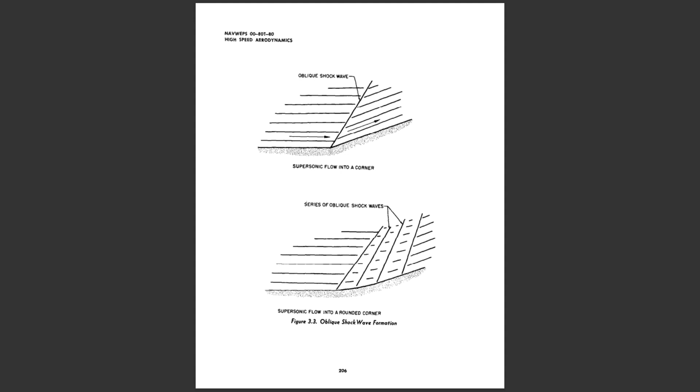The previous flow across a wedge in a supersonic airstream would allow flow in 2 dimensions. If a cone were placed in a supersonic airstream, the airflow would occur in 3 dimensions, and there would be some noticeable differences in flow characteristics.

3-dimensional flow for the same Mach number and flow direction change would produce a weaker shockwave with less change in pressure and density. Also, this conical wave formation allows changes in airflow that continue to occur past the wave front, and the wave strength varies with distance away from the surface. Figure 3.5 depicts the typical 3-dimensional flow past a cone.

Oblique shock waves can be reflected like any pressure wave, and this effect is shown in Figure 3.5. This reflection appears logical and necessary, since the original wave changes the flow direction toward the wall, and the reflected wave creates the subsequent flow change to cause the flow to remain parallel to the wall surface.

This reflection phenomenon places definite restrictions on the size of a model in a wind tunnel, since a wave reflected back to the model would cause a pressure distribution not typical of free flight.

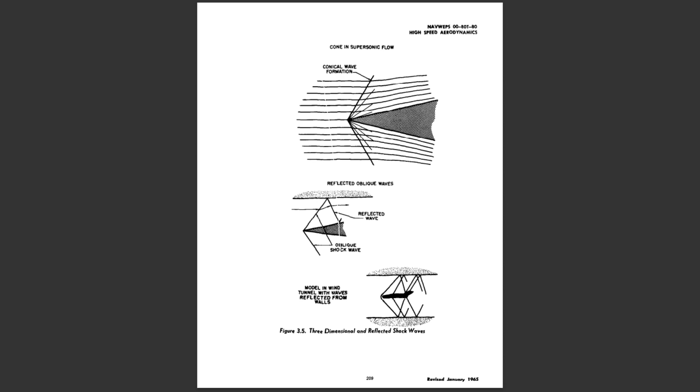Normal shock wave. If a blunt-nosed object is placed in a supersonic airstream, the shock wave which is formed will be detached from the leading edge. This detached wave also occurs when a wedge or cone angle exceeds some critical value.

Whenever the shock wave forms perpendicular to the upstream flow, the shock wave is termed a normal shock wave, and the flow immediately behind the wave is subsonic.

Any relatively blunt object in a supersonic airstream will form a normal shock wave immediately ahead of the leading edge, slowing the airstream to subsonic so the airstream may feel the presence of the blunt nose and flow around it. Once past the blunt nose, the airstream may remain subsonic or accelerate back to supersonic, depending on the shape of the nose and the Mach number of the free stream.

In addition to the formation of normal shock waves described above, this same type of wave may be formed in an entirely different manner when there is no object in the supersonic airstream. Whenever a supersonic airstream is slowed to subsonic without a change in direction, a normal shock wave will form as a boundary between the supersonic and subsonic regions. This is an important fact, since aircraft usually encounter some compressibility effects before the flight speed is sonic.

Figure 3.6 illustrates the manner in which an airfoil at high subsonic speeds has local flow velocities which are supersonic. As the local supersonic flow moves aft, a normal shock wave forms, slowing the flow to subsonic.

The transition of flow from subsonic to supersonic is smooth, and is not accompanied by shock waves if the transition is made gradually with a smooth surface. The transition of flow from supersonic to subsonic without direction change always forms a normal shock wave. A supersonic airstream passing through a normal shock wave will experience these changes.

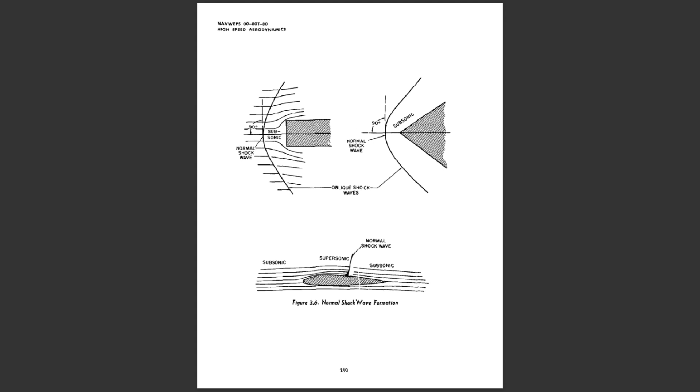3. The static pressure of the airstream behind the wave is increased greatly. 4. The density of the airstream behind the wave is increased greatly. 5. The energy of the airstream, indicated by total pressure, dynamic plus static, is greatly reduced. The normal shock wave is very wasteful of energy.

Expansion wave. If a supersonic airstream were turned away from the preceding flow, an expansion wave would form. The flow around a corner, shown in Figure 3.7, will not cause sharp sudden changes in the airflow except at the corner itself, and thus is not actually a shock wave.

A supersonic airstream passing through an expansion wave will experience these changes. 1. The airstream is accelerated, the velocity and Mach number behind the wave are greater.

The flow direction is changed to flow along the surface, provided separation does not occur. The static pressure of the airstream behind the wave is decreased.

The density of the airstream behind the wave is decreased. Since the flow changes in a rather gradual manner, there is no shock and no loss of energy in the airstream. The expansion wave does not dissipate airstream energy.

The expansion wave in 3 dimensions is a slightly different case, and the principal difference is the tendency for the static pressure to continue to decrease past the wave.

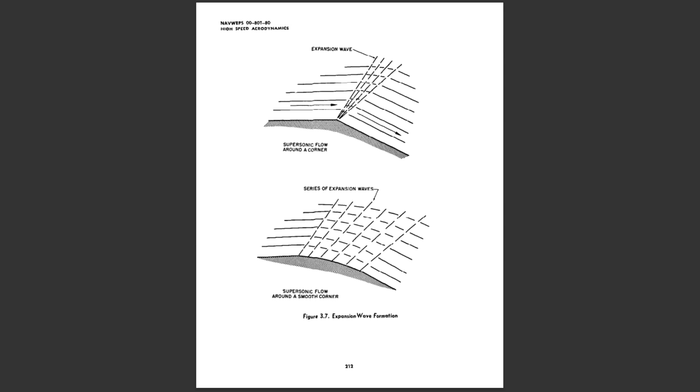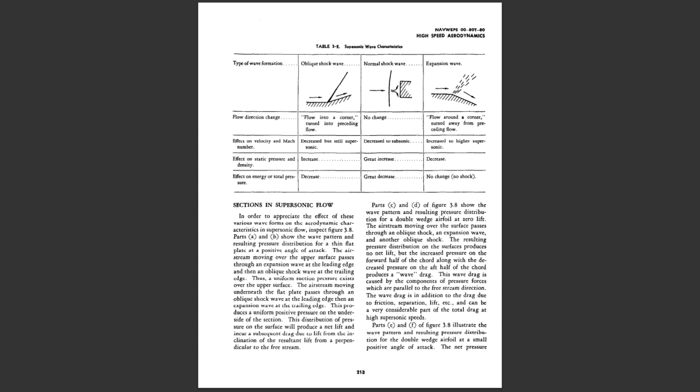The following table is provided to summarize the characteristics of the 3 principal wave forms encountered with supersonic flow sections. In order to appreciate the effect of these various wave forms on the aerodynamic characteristics in supersonic flow, inspect Figure 3.8.

Parts A and B show the wave pattern and resulting pressure distribution for a thin flat plate at a positive angle of attack. The airstream moving over the upper surface passes through an expansion wave at the leading edge, and then an oblique shock wave at the trailing edge. Thus, a uniform suction pressure exists over the upper surface.

The airstream moving underneath the flat plate passes through an oblique shock wave at the leading edge, then an expansion wave at the trailing edge. This produces a uniform positive pressure on the underside of the section.

This distribution of pressure on the surface will produce a net lift and incur a subsequent drag due to lift, from the inclination of the resultant lift from a perpendicular to the free stream.

Parts C and D of Figure 3.8 show the wave pattern and resulting pressure distribution for a double wedge airfoil at 0 lift. The airstream moving over the surface passes through an oblique shock, an expansion wave, and another oblique shock. The resulting pressure distribution on the surfaces produces no net lift,

but the increased pressure on the forward half of the chord along with the decreased pressure on the aft half of the chord produce a wave drag. This wave drag is caused by the components of pressure forces which are parallel to the free stream direction.

The wave drag is in addition to the drag due to friction, separation, lift, etc., and can be a very considerable part of the total drag at high supersonic speeds.

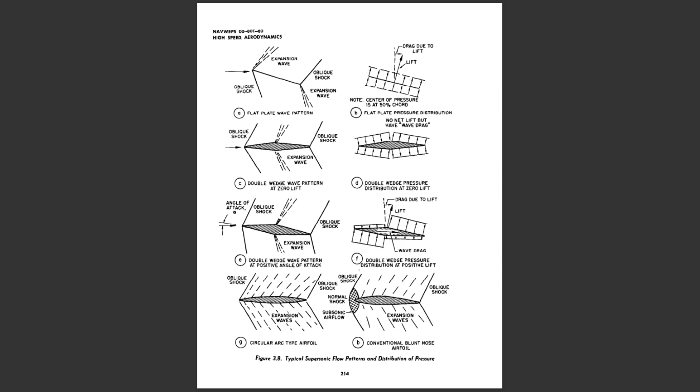Configuration effects. Transonic and supersonic flight.

Any object in subsonic flight which has some finite thickness or is producing lift will have local velocities on the surface which are greater than the free stream velocity. Hence, compressibility effects can be expected to occur at flight speeds less than the speed of sound.

The transonic regime of flight provides the opportunity for mixed subsonic and supersonic flow and accounts for the first significant effects of compressibility. Consider a conventional airfoil shape as shown in Figure 3.9. If this airfoil is at a flight Mach number of 0.50 and a slight positive angle of attack, the maximum local velocity on the surface will be greater than the flight speed, but most likely less than sonic speed.

Assume that an increase in flight Mach number to 0.72 would produce the first evidence of local sonic flow. This condition of flight would be the highest flight speed possible without supersonic flow and would be termed the critical Mach number. Thus, critical Mach number is the boundary between subsonic and transonic flight and is an important point of reference for all compressibility effects encountered in transonic flight.

By definition, critical Mach number is the freestream Mach number which produces first evidence of local sonic flow. Therefore, shock waves, buffet, airflow separation, etc., take place above critical Mach number.

As critical Mach number is exceeded, an area of supersonic airflow is created, and a normal shock wave forms as the boundary between the supersonic flow and the subsonic flow on the aft portion of the airfoil surface. The acceleration of the airflow from subsonic to supersonic is smooth and unaccompanied by shock waves if the surface is smooth, and the transition gradual.

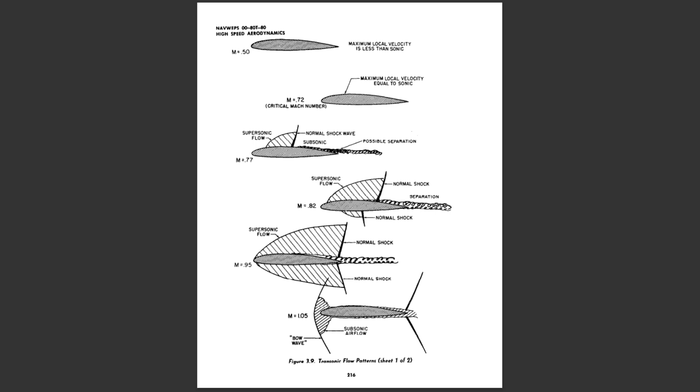Of course, all components of the aircraft are affected by compressibility in a manner somewhat similar to that of the basic airfoil. The tail, fuselage, nacelles, canopy, etc., and the effect of the interference between the various surfaces of the aircraft must be considered.

Force divergence. The airflow separation induced by shock wave formation can create significant variations in the aerodynamic force coefficients. When the free stream speed is greater than the critical Mach number, some typical effects on an airfoil section are as follows. One, an increase in the section drag coefficient for a given section lift coefficient.

Two, a decrease in section lift coefficient for a given section angle of attack. Three, a change in section pitching moment coefficient.

A reference point is usually taken by a plot of drag coefficient versus Mach number for a constant lift coefficient. Such a graph is shown in Figure 3.10. The Mach number which produces a sharp change in the drag coefficient is termed the force divergence Mach number and, for most airfoils, usually exceeds the critical Mach number at least 5 to 10%. This condition is also referred to as the drag divergence or drag rise.

Phenomena of transonic flight. Associated with the drag rise are buffet, trim, and stability changes, and a decrease in control surface effectiveness. Conventional aileron, rudder, and elevator surfaces subjected to this high-frequency buffet may buzz, and changes in hinge moments may produce undesirable control forces.

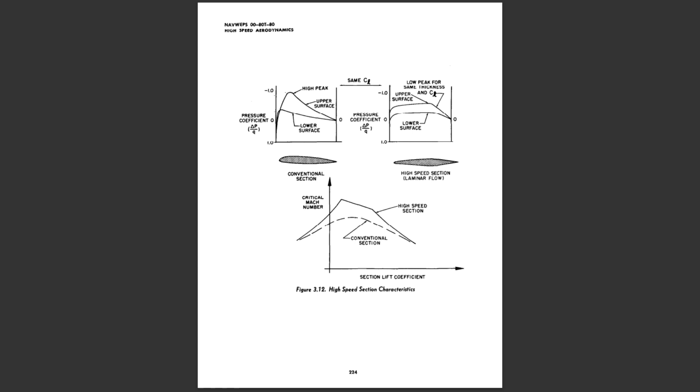In order to obtain a high critical Mach number from an airfoil at some low lift coefficient, the section must have: a) Low thickness ratio. The point of maximum thickness should be aft to smooth the pressure distribution. b) Low camber. The mean camber line should be shaped to help minimize the local velocity peaks. In addition, the higher the required lift coefficient, the lower the critical Mach number, and more camber is required of the airfoil.

If supersonic flight is a possibility, the thickness ratio and leading edge radius must be small to decrease wave drag. Figure 3.13 shows the flow patterns for two basic supersonic airfoil sections and provides the approximate equations for lift, drag, and lift curve slope.

Since the wave drag is the only factor of difference between the two airfoil sections, notice the configuration factors which affect the wave drag. For the same thickness ratio, the circular arc airfoil would have a larger wedge angle formed between the upper and lower surfaces at the leading edge. At the same flight Mach number, the larger angle at the leading edge would form the stronger shock wave at the nose and cause a greater pressure change on the circular arc airfoil.

This same principle applies when investigating the effect of airfoil thickness. Notice that the wave drag coefficients for both airfoils vary as the square of the thickness ratio, e.g., if the thickness ratio were doubled, the wave drag coefficient would be 4 times as great. If the thickness were increased, the airflow at the leading edge will experience a greater change in direction, and a stronger shock wave will be formed.

This powerful variation of wave drag with thickness ratio necessitates the use of very thin airfoils with sharp leading edges for supersonic flight. An additional consideration is that thin airfoil sections favor the use of low aspect ratios and high taper to obtain lightweight structures and preserve stiffness and rigidity.

The parameter, square root of M squared minus 1, appears in the denominator of each of the equations for the aerodynamic coefficients, and indicates a decrease in each of these coefficients with an increase in Mach number. Essentially, this means that any aerodynamic surface becomes less sensitive to changes in angle of attack at higher Mach numbers. The decrease in lift curve slope with Mach number has tremendous implications in the stability and control of high-speed aircraft.

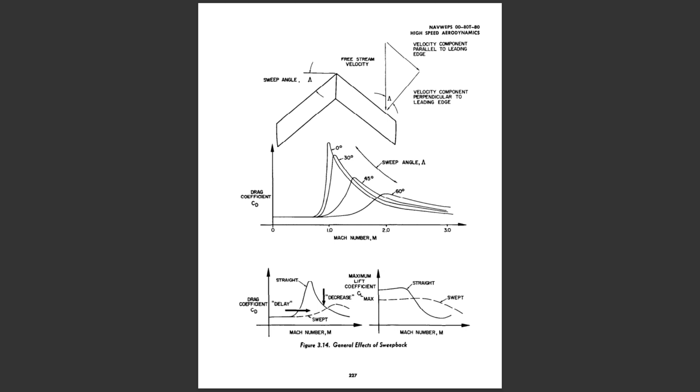An immediate conclusion is that sweepback is a device of greatest application in the regime of transonic flight. A few of the less significant advantages of sweepback are as follows.

First, the wing lift curve slope is reduced for a given aspect ratio. This is illustrated by the lift curve comparison of figure 3.15 for the straight and swept wing. Any reduction of lift curve slope implies the wing is less sensitive to changes in angle of attack.

This is a beneficial effect only when the effect of gusts and turbulence is considered. Since the swept wing has the lower lift curve slope, it will be less sensitive to gusts and experience less bump due to gust for a given aspect ratio and wing loading. This is a consideration particular to the aircraft whose structural design shows a predominating effect of the gust load spectrum, e.g., transport, cargo, and patrol types.

Second, divergence of a surface is an aeroelastic problem which can occur at high dynamic pressures. Combined bending and twisting deflections interact with aerodynamic forces to produce sudden failure of the surface at high speeds. Sweep forward will aggravate this situation by leading the wing into the wind stream, and tends to lower the divergence speed. On the other hand, sweepback tends to stabilize the surface by trailing and tends to raise the divergence speed. By this tendency, sweepback may be beneficial in preventing divergence within the anticipated speed range.

Third, sweepback contributes slightly to the static directional, or weathercock, stability of an aircraft. This effect may be appreciated by inspection of figure 3.14, which shows the swept wing in a yaw or side slip. The wing into the wind has less sweep and a slight increase in drag, the wing away from the wind has more sweep and less drag. The net effect of these force changes is to produce a yawing moment, tending to return the nose into the relative wind. This directional stability contribution is usually small and of importance in tailless aircraft only.

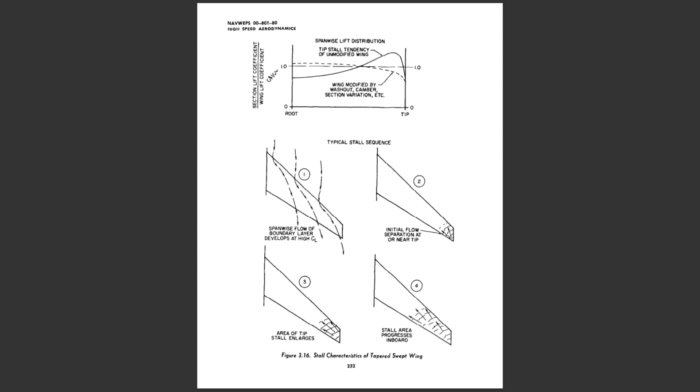The combined effect of taper and sweep present a considerable problem of tip stall, illustrated by the flow patterns of figure 3.16. Design for high-speed performance may dictate high sweepback, while structural efficiency may demand a highly tapered planform. When such is the case, the wing may require extensive aerodynamic tailoring to provide a suitable stall pattern and a lift distribution at cruise condition which reduces drag due to lift. Washout of the tip, variation of section camber throughout span, flow fences, slats, leading edge extension, etc., are typical devices used to modify the stall pattern and minimize drag due to lift at cruise condition.

As shown by the lift curve of figure 3.15, the use of sweepback will reduce the lift curve slope and the subsonic maximum lift coefficient. It is important to note this case is definitely subsonic, since sweepback may be used to improve the transonic maneuvering capability. Various sweep angles applied to wings of moderate aspect ratio produce these approximate effects on the subsonic lift characteristics.

Sweep angle 0 degrees: 0% reduction of subsonic maximum lift coefficient and lift curve slope. Sweep angle 15 degrees: 4% reduction. Sweep angle 30 degrees: 14% reduction. Sweep angle 45 degrees: 30% reduction. Sweep angle 60 degrees: 50% reduction of subsonic maximum lift coefficient and lift curve slope.

The reduction of the low speed maximum lift coefficient, which is in addition to that lost due to tip stall, has very important implications in design. If wing loading is not reduced, stall speeds increase, and subsonic maneuverability decreases. On the other hand, if wing loading is reduced, the increase in wing surface area may reduce the anticipated benefit of sweepback in the transonic flight regime. Since the requirements of performance predominate, certain increases of stall speeds, takeoff speeds, and landing speeds usually will be accepted.

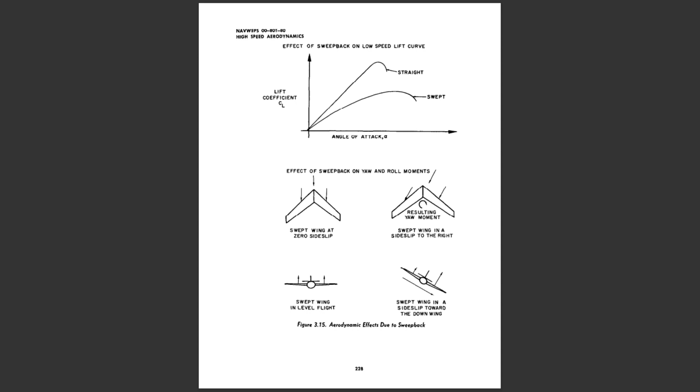While the reduction of lift curve slope may be an advantage for gust considerations, the reduced sensitivity to changes in angle of attack has certain undesirable effects in subsonic flight. The reduced wing lift curve slope tends to increase maximum lift angles of attack and complicate the problem of landing gear design and cockpit visibility. Also, the lower lift curve slope would reduce the contribution to stability of a given tail surface area.

Third, the use of sweepback will reduce the effectiveness of trailing edge control surfaces and high lift devices. A typical example of this effect is the application of a single slotted flap over the inboard 60% span to both a straight wing and a wing with 35-degree sweepback. The flap applied to the straight wing produces an increase in maximum lift coefficient of approximately 50%. The same type flap applied to the swept wing produces an increase of approximately 20%. To produce some reasonable maximum lift coefficient, a swept wing may require unsweeping the flap hinge line, application of leading-edge high-lift devices such as slots or slats, and possibly boundary layer control.

Fourth, as described previously, sweepback contributes to lateral stability by producing stable rolling moments with side slip. The lateral stability contribution of sweepback varies with the amount of wing sweepback and wing lift coefficient. Large sweepback and high lift coefficients produce large contributions to lateral stability. While stability is desirable, any excess of stability will reduce controllability. For the majority of airplane configurations, high lateral stability is neither necessary nor desirable, but adequate control in roll is absolutely necessary for good flying qualities.

An excess of lateral stability from sweepback can aggravate Dutch roll problems and produce marginal control during crosswind takeoff and landing where the aircraft must move in a controlled side slip. Therefore, it is not unusual to find swept-wing aircraft with negative dihedral and lateral control devices designed principally to meet crosswind takeoff and landing requirements.

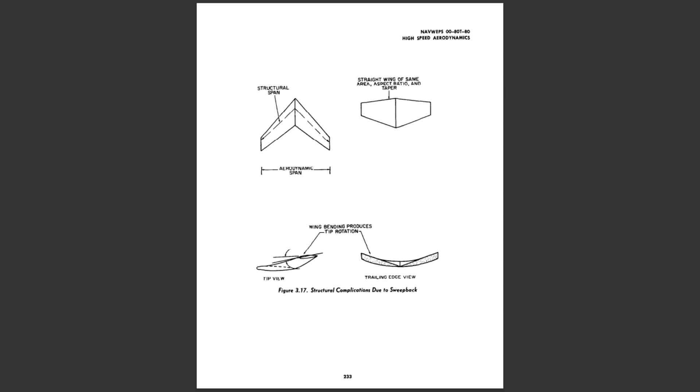Effect of aspect ratio and tip shape.

In addition to wing sweep, planform properties such as aspect ratio and tip shape can produce significant effects on the aerodynamic characteristics at high speeds. There is no particular effect of aspect ratio on critical Mach number at high or medium aspect ratios. The aspect ratio must be less than 4 or 5 to produce any apparent change in critical Mach number.

This effect is shown for a typical 9% thick symmetrical airfoil in the graph of Figure 3.18. Note that very low aspect ratios are required to cause a significant increase in critical Mach number. Very low aspect ratios create the extremes of three-dimensional flow and a subsequent increase in free stream speed to create local sonic flow.

Actually, the extremely low aspect ratios required to produce high critical Mach numbers are not too practical. Generally, the advantage of low aspect ratios must be combined with sweepback and high-speed airfoil sections.

The thin rectangular wing in supersonic flow illustrates several important facts. As shown in Figure 3.18, Mach cones form at the tips of the rectangular wing and affect the pressure distribution on the area within the cone. The vortex develops within the tip cone due to the pressure differential, and the resulting average pressure on the area within the cone is approximately half the pressure between the cones.

Three-dimensional flow on the wing is then confined to the area within the tip cones, while the area between the cones experiences pure two-dimensional flow.

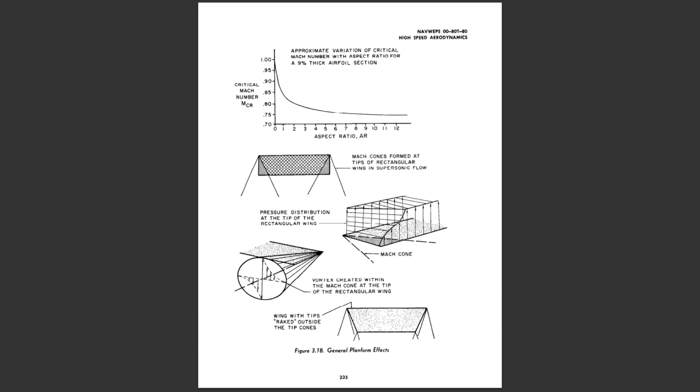This comparison makes it obvious that supersonic flight does not demand the use of high aspect ratio planforms typical of low-speed aircraft. In fact, low aspect ratios and high taper are favorable from the standpoint of structural considerations if very thin sections are used to minimize wave drag.

If sweepback is applied to the supersonic wing, the pressure distribution will be affected by the location of the Mach cone with respect to the leading edge. Figure 3.19 illustrates the pressure distribution for the delta wing planform in supersonic flight, with the leading edge behind or ahead of the Mach cone.

When the leading edge is behind the Mach cone, the components of velocity perpendicular to the leading edge are still subsonic, even though the free stream flow is supersonic, and the resulting pressure distribution will greatly resemble the subsonic pressure distribution for such a planform.

Tailoring the leading edge shape and camber can minimize the components of the high leading edge suction pressure, which are inclined in the drag direction, and the drag due to lift can be reduced.

If the leading edge is ahead of the Mach cone, the flow over this area will correspond to the two-dimensional supersonic flow and produce constant pressure for that portion of the surface between the leading edge and the Mach cone.

Control surfaces. The design of control surfaces for transonic and supersonic flight involves many important considerations. This fact is illustrated by the typical transonic and supersonic flow patterns of Figure 3.19. Trailing edge control surfaces can be affected adversely by the shock waves formed in flight above critical Mach number.

If the airflow is separated by the shock wave, the resulting buffet of the control surface can be very objectionable. In addition to the buffet of the surface, the change in the pressure distribution due to separation and the shock wave location can create very large changes in control surface hinge moments.

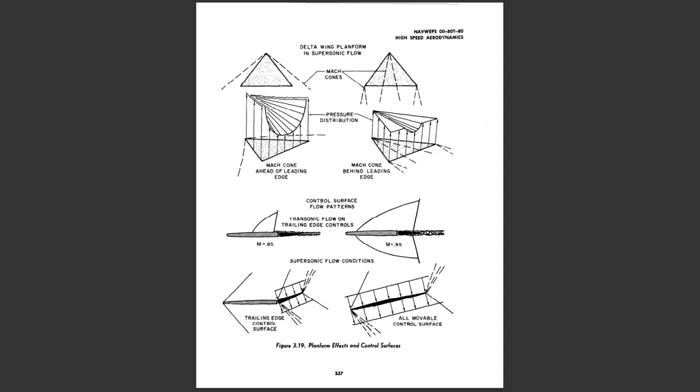Supersonic engine inlets. Air which enters the compressor section of a jet engine or the combustion chamber of a ramjet usually must be slowed to subsonic velocity. This process must be accomplished with the least possible waste of energy.

At flight speeds just above the speed of sound, only slight modifications to ordinary subsonic inlet design produce satisfactory performance. However, at supersonic flight speeds, the inlet design must slow the air with the weakest possible series, or combination, of shock waves to minimize energy losses and temperature rise.

Figure 3.20 illustrates some of the various forms of supersonic inlets or diffusers. One of the least complicated types of inlet is the simple normal shock type diffuser. This type of inlet employs a single normal shock wave at the inlet with a subsequent internal subsonic compression. At low supersonic Mach numbers, the strength of the normal shock wave is not too great, and this type of inlet is quite practical. At higher supersonic Mach numbers, the single normal shock wave is very strong and causes a great reduction in the total pressure recovered by the inlet.

In addition, it is necessary to consider that the wasted energy of the airstream will appear as an additional undesirable rise in temperature of the captured inlet airflow.

If the supersonic airstream can be captured, the shock wave formations will be swallowed, and a gradual contraction will reduce the speed to just above sonic. The subsequent diverging flow section can then produce the normal shock wave, which slows the airstream to subsonic. Further expansion continues to slow the air to lower subsonic speeds. This is the convergent-divergent type inlet shown in figure 3.20.

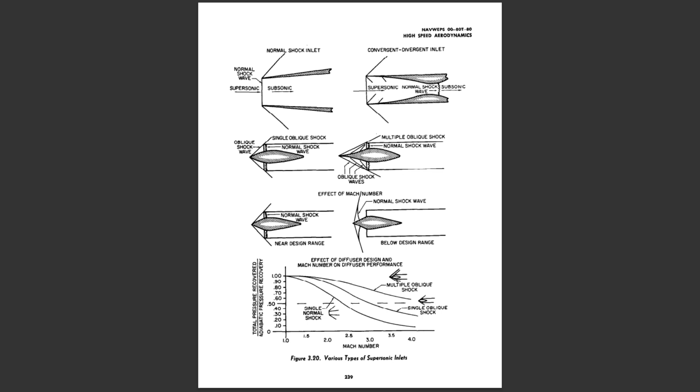In order to develop a good, stable inlet design, the performance at the design condition may be compromised. A large variation of inlet flow conditions may require special geometric features for the inlet surfaces, or a completely variable geometry inlet design. Supersonic configurations.

When all the various components of the supersonic airplane are developed, the most likely general configuration properties will be as follows.

1. The wing will be of low aspect ratio, have noticeable taper, and have sweepback depending on the design speed range. The wing sections will be of low thickness ratio and require sharp leading edges.

2. The fuselage and nacelle will be of high fineness ratio, long and slender. The supersonic pressure distribution may create significant lift and drag, and require consideration of the stability contribution of these surfaces.

3. The tail surfaces will be similar to the wing: low aspect ratio, tapered, swept, and a thin section with sharp leading edge. The controls will be fully powered and irreversible, with all movable surfaces the most likely configuration.

4. In order to reduce interference drag in transonic and supersonic flight, the gross cross-section of the aircraft may be area-ruled to approach that of some optimum high-speed shape.

One of the most important qualities of high-speed configurations will be the low-speed flight characteristics. The low aspect ratio swept-wing planform has the characteristic of high induced drag at low flight speeds.

Steep turns, excessively low airspeeds, and steep, power-off approaches can then produce extremely high rates of descent during landing. Sweepback and low aspect ratio can cause severe deterioration of handling qualities at speeds below those recommended for takeoff and landing.

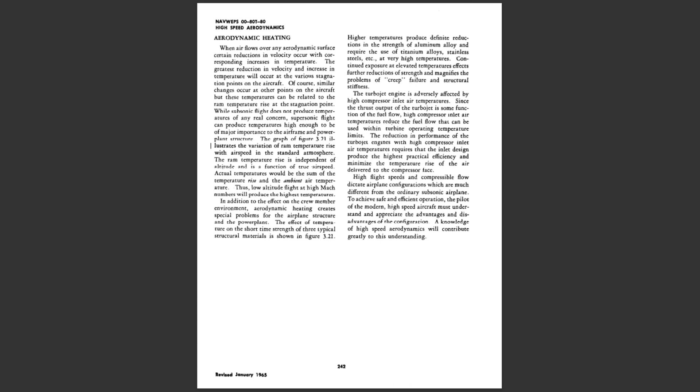Aerodynamic heating. When air flows over any aerodynamic surface, certain reductions in velocity occur with corresponding increases in temperature. The greatest reduction in velocity and increase in temperature will occur at the various stagnation points on the aircraft.

Similar changes occur at other points on the aircraft, but these temperatures can be related to the ram temperature rise at the stagnation point.

While subsonic flight does not produce temperatures of any real concern, supersonic flight can produce temperatures high enough to be of major importance to the airframe and powerplant structure.

The graph of Figure 3.21 illustrates the variation of ram temperature rise with airspeed in the standard atmosphere. The ram temperature rise is independent of altitude and is a function of true airspeed.

Actual temperatures would be the sum of the temperature rise and the ambient air temperature. Thus, low-altitude flight at high Mach numbers will produce the highest temperatures.

In addition to the effect on the crew member environment, aerodynamic heating creates special problems for the airplane structure and the power plant. The effect of temperature on the short-time strength of three typical structural materials is shown in Figure 3.21.

Higher temperatures produce definite reductions in the strength of aluminum alloys, and require the use of titanium alloys, stainless steels, etc., at very high temperatures.

Continued exposure at elevated temperatures effects further reductions of strength, and magnifies the problems of creep failure and structural stiffness.

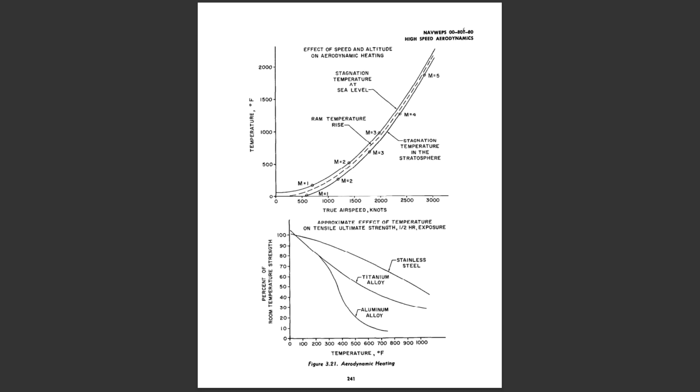High flight speeds and compressible flow dictate airplane configurations which are much different from the ordinary subsonic airplane. To achieve safe and efficient operation, the pilot of the modern, high-speed aircraft must understand and appreciate the advantages and disadvantages of the configuration. A knowledge of high-speed aerodynamics will contribute greatly to this understanding.